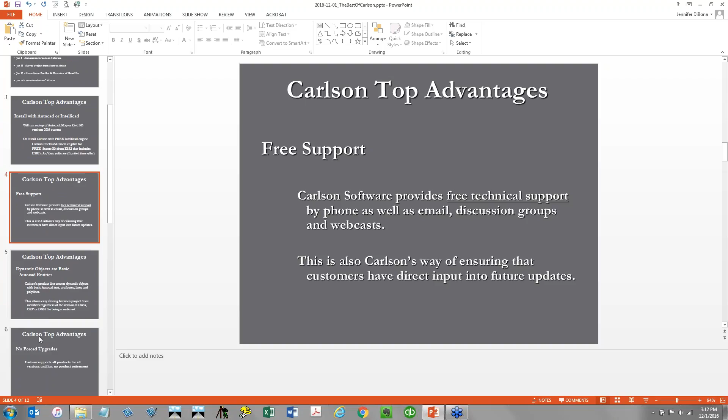All right. Carlson's got a lot of dynamic features, a lot of dynamic reactors when you update a surface or update a centerline or something like that. However, everything that Carlson creates are basic AutoCAD entities. So you can do things like automatic leaders with your points. You can move contour labels along the contour, have it slide along it. But it's doing it just with contours as polylines, and text labels.

It's not unique proprietary objects like Land Desktop and Civil 3D use, where you get proxy errors or you have trouble sending or receiving those files from somebody not using your same version of Civil 3D. So it's very friendly regardless of what other programs you use. Those Carlson files will convert real easily to DGNs or DXF or whatever you need to send it to.

Carlson does have an annual maintenance program for the desktop software, and that would include the latest release of Carlson plus whatever IntelliCAD is shipping with it at the time. It's optional, so you don't have to do it. I'll go through some pricing here in a minute, but it's 10% of the retail price each year. And if you skip a year, 2 years, 3 years, the price goes up incrementally. But no matter how many years behind you fall, you're never going to pay more than 50% of the retail price to get up to date and current. So it's a good thing. Staying on maintenance is, I believe, still the cheapest way to stay current if you wish to.

Okay, so I am running here Carlson 2017 with IntelliCAD, and we've got our menu bar here. And one thing you'll notice is that in all of the Carlson desktop programs, depending on what version, the first 7 or 8 menus are going to be identical. So in every single program, you've got everything under the File, the Edit, View, Draw, Inquiry, Settings, most importantly, Points. Everything under Points you're going to have in every program. So if you're in GIS, you may not think that you get all the points functionality, but you do. If you're in CADNet, you may not think it's necessary, but you get it.

3D solids, if you're running on IntelliCAD, this is new in 2017, you get that one too in every program. Here in Carlson Survey, there's just a few menus that are completely unique. So the Survey menu and the COGO menu can only be found in Survey. And some of these commands are going to be in construction, so there's some overlap. Centerline, area layout, annotate, and surface are in civil as well. However, if you're in civil, and I'll show you this in a second, you've got a surface menu, then you've got a centerlines menu, then you have a profiles menu. And here in Carlson Survey, you don't have the profiles menu, but if you look down here at the bottom, you get a lot of profiling ability. So I will go through some of that today.

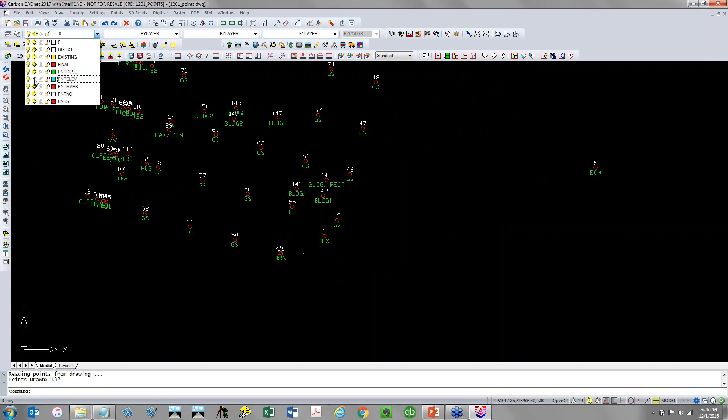Also my layers, everything's on the same layer here. So if I freeze points, everything goes away. If I freeze the point elevation layer, all of the elevations go away. Same with description. So functionality, it's not the greatest if you have to try to connect all these. Now I'll switch back to survey so that I can go in and draw with field to finish. And okay, I have to select my code table. And I'll use this one.

All right, so I'm going to just jump into my edit code so you can see here real quickly things like my back of curbs. So I can set up 2D and 3D polylines. I can set up special symbols if I want, special line types if I want. Got point groups, different layers for 2D polyline versus 3D, different layer for the points, all kinds of stuff.

Also, this is going to come up for things like property corners or fire hydrants that will have a good elevation shot in the field but may not be optimal for surfaces. You can also tag certain points by their description as non-surface. So you'll see that when I go to build a surface from this, anything that I've tagged as non-surface is going to be ignored. So I'm not going to make any changes.

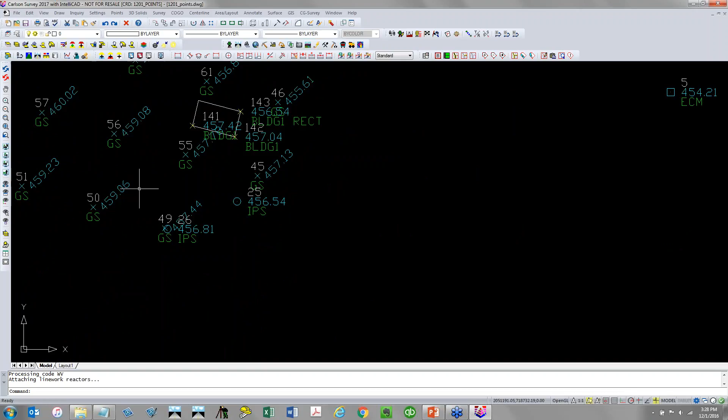And I'm just going to redraw everything. This time with field to finish, you can see the difference. So I've done a lot of different things here. I have different symbols. My sizing on my symbols may not be perfect. So it is a pine tree symbol. Property corners have open circles. Ground shots have this elevation kicked out at a 45-degree angle, so it's really easy to see. You can see I've got line work that's been drawn.

So we saw in the field to finish codes that we've got 2D and 3D line work, which I can show you in a second. But my layers is the big difference here. You can see I've got a ton more layers. All of my points are on layers with V-NODE, so it's kind of a modified National CAD standard. I'll turn on a couple of these.

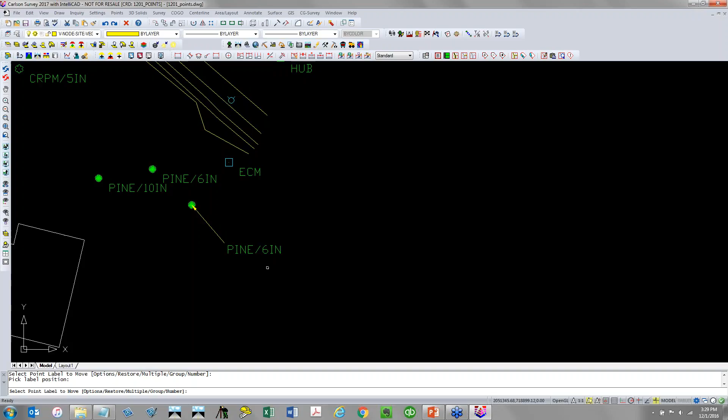So I've even got my layers broken out a bit so that if I choose to, let me turn off just the elevations. If I choose to turn off certain things, I can have my corners labeled, and I can even use the descriptions from the points as the point labels if I want. So I can do some other things with my coding and make that a little more descriptive. It's not perfect. There's a crepe myrtle tree, things like that.

So we can use different coding to size symbols, to bring in canopies. If you have several trees and have a real size canopy, it will merge those together to actually get the combined canopy. So all kinds of things with this. So let me go ahead and turn all my layers back on.

And let's look at this in 3D. Usually I do this right before I build the surface, and I'm not quite ready to do that yet. But if I look in my 3D viewer, I'll just select everything here, and I can tip it up on its side, you can see that I've got everything colored by elevation. My highest elevations are in red, my lowest are in blue. It's a pretty flat site,

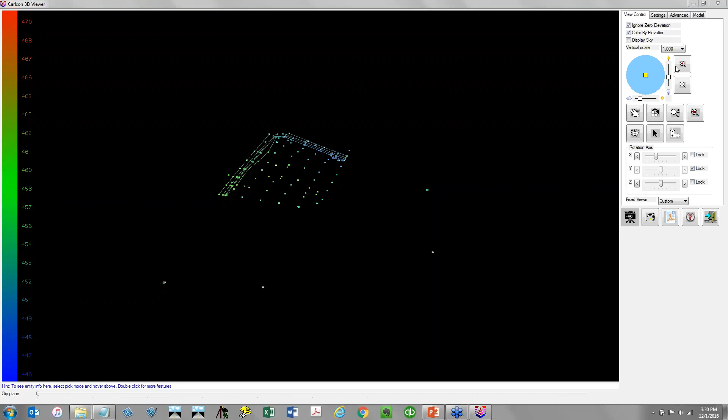so if I want to, I can exaggerate my Z values. So you can actually see the 3D polylines that were drawn, my elevated points. And if I zoom out here right now, all my zeros are being ignored. So I'm going to uncheck that, and now you can see the 0 2D polyline versions of everything. So I'll turn that back on.

But before I build a surface, this is one of my checks. I would want to look at it here in 3D, spin it around, make sure I don't have any bad elevations. Now I've clearly got good topo, good break lines here, and some boundary points out here that I'm going to need to ignore for my surface, and I'll show you how that happens.

But before I get to the surface, I also want to show you, this is kind of neat. I want to see if we've got any monuments close. Published control is what Carlson calls it. And this is one of the commands in the software that is coordinated by Esri. In order to do this, though, I need to make sure that I'm georeferenced.

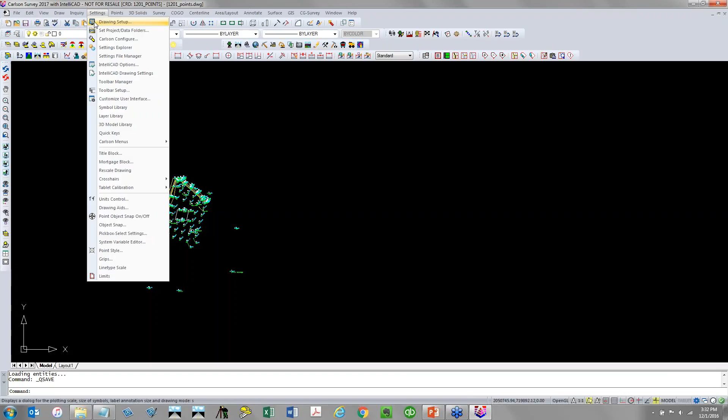So if you look at my coordinates down here, I am in North Carolina, my coordinates are real, but I still have to go to drawing setup, and I can set this up with my template or on my startup so that every drawing that I start is always in a particular zone and projection set at a current datum. Didn't have that here, so I had to make sure to turn that on.

But now this is under the points menu, so you get this in every program. Point utilities, search published control. So this is looking at, I think, is it NGS? So what you do is just zoom into the area on the map. Okay, so this little project, gotten lost, right down here.

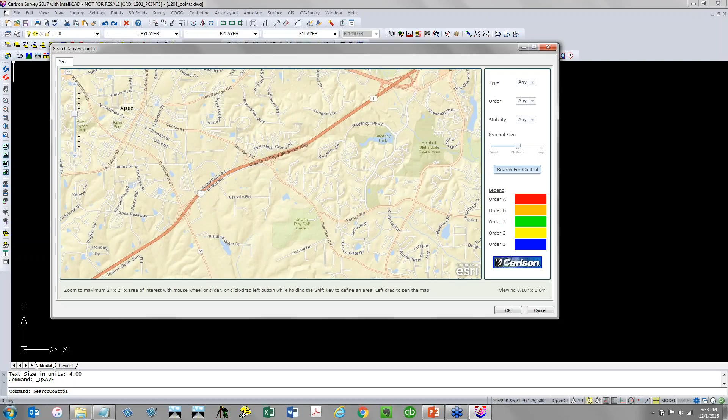All right, it's not giving me, I'm not seeing my apex. There we are. Oh, I was in the wrong place, so we're down here. So we're right in this area. So once I zoom in somewhat close, I'm going to search for control. And it's going to pop up these little icons.

So there's a legend. You can kind of see what the quality is. I'm not going to worry so much about the quality just in this demonstration. So if I click on these, it gives me a link. And if I click on that, it's going to open it up in a tab and show me the data sheet.

And I can switch back to the map. I can pick as many as I want. Click on any of the links. It opens as many as I need. You can close whatever's not good. But when you have the ones open that you feel like are going to work for you, you can hit the OK button. And it gives you the option to just take those points and store them in your coordinate

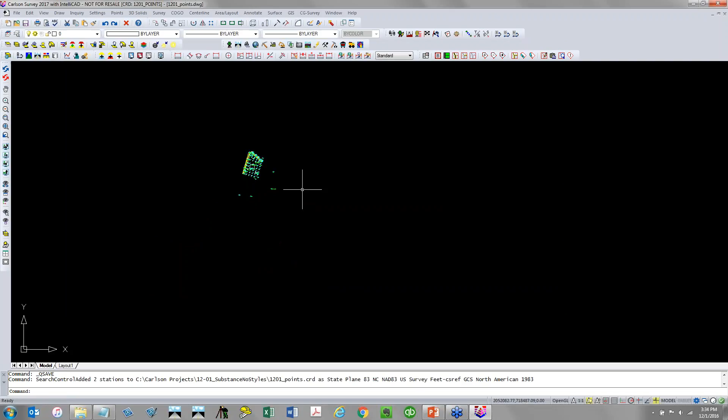file. So it takes just a second, and you kind of have to learn this. It does exactly what it said it was going to do. It put them in your CRD file, but it doesn't import them into your drawing. You have to go look for those. So I'll open this up under Edit Points. And if I look at the very bottom, you can see that these 2 points have been added.

They have an alphanumeric number, so I always just kind of take that out. So I've got points 1064 and 1065. And if I go back to my draw locate, I just want to draw a range and see those two. All right, so they just came in, and here's my Violet, and here's Pete. So I got those two in.

So while I'm talking about the georeferencing and other commands that Esri has worked with Carlson on, let me switch to GIS here. Okay, so now I had trouble. This does go online. You do have to have an internet connection for Search Published Control, and what I'm getting ready to show you. This did not work earlier today. I was getting an error connecting to the database. So there's another way around it, but sometimes this happens.

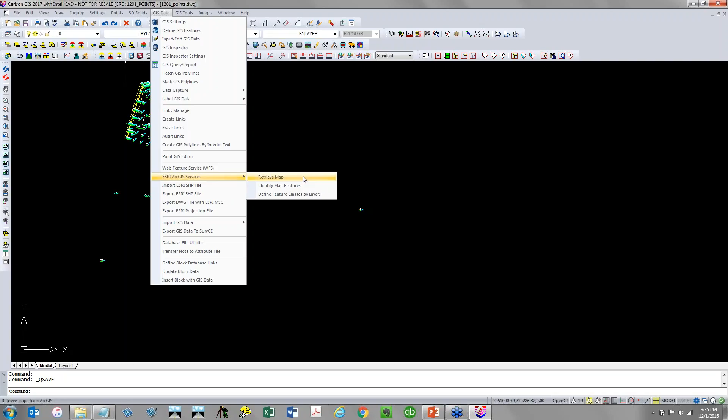So I'm going to do Esri ArcGIS Services Retrieve map. This is only in Carlson GIS. So these are the different maps that you can bring in. What I'm going to do is a world imagery, but just kind of take a look at what else is available. NGS Topo is going to be like a quad map. You're not going to have your different quadrangle names and things like that. You just pick an area on your screen. Under specialty, you can get things like a state soil survey. Okay, so you can kind of dig into this and get a lot of cool things.

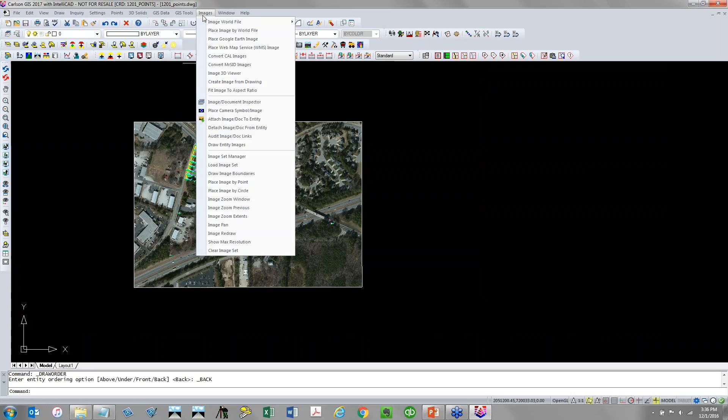So I mentioned a workaround. Also, Carlson just gave us this, I think in 2016. You can do place web map service image, and it kind of sort of does the same thing. It gives you a few other options. It will pull in the same maps that the Esri does, and then there's some different ones. What's nice about this, it also gives you the ability to connect to maybe your local government agencies that have their own map service. You can possibly pull in from there.

Under GIS data, there's a web feature service. So like NCDOT, you can pull in some highway feature lines. So this is more polylines and line work and nodes and things like that, as opposed to just images. So, all right, any questions?

All right. Hey, Tim, I've unmuted you. What's your question? Can you hear me? If you don't have a microphone, you may not be able to talk back to me. So you can type in your question and I will look for it. All right, I'll keep an eye out for that. And I'll keep your microphone open here. If you figure out how to get that to work, holler at me.

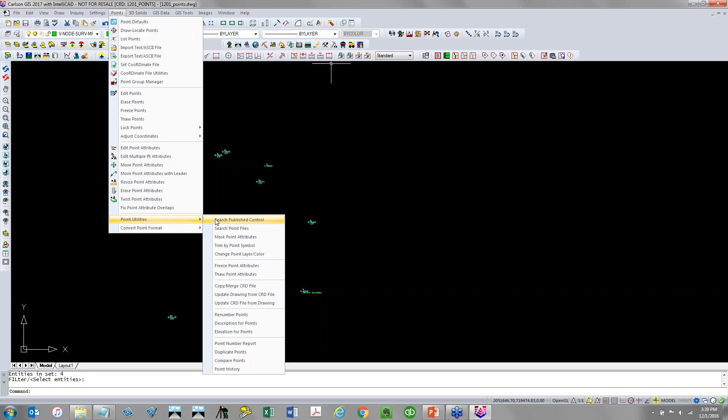One of the cool things about this command, all right, I got Tim's question here, where do I find the survey control points? Are you talking about the command that I just did? If so, it's Search Published Control. Not sure if that's what you're asking about, but okay, that was it. Cool.

All right, so I'm going to enter this deed description. You can see I've got my monuments here. I'm going to start at point number 4, and then I've got on a piece of paper here beside me, I've got my calls. So I am going to key this in. I'm going to go back to Carlson Survey.

So there are different ways that you can enter line work based on bearings and distances and different angles. But doing it the way I'm getting ready to show you, it saves it as a deed file, so it's very editable, and I like it. This is one of my favorite commands in Carlson. So I've got an option to create points. I'm not going to. I'm going to store this to a deed file and start with point 4.

All right, and I am going to start off with a bearing northeast 65 degrees 44 minutes 47 seconds at 35.67. So looking at the command line, 1 is my quadrant. 65 degrees 44 minutes 47 seconds at 35.67 feet. Next is going to be southeast 49 degrees, 30 minutes and 7 seconds, 197.58. Next is going to be southeast 52 degrees, 45 minutes, 14 seconds, 285.33. So far so good.

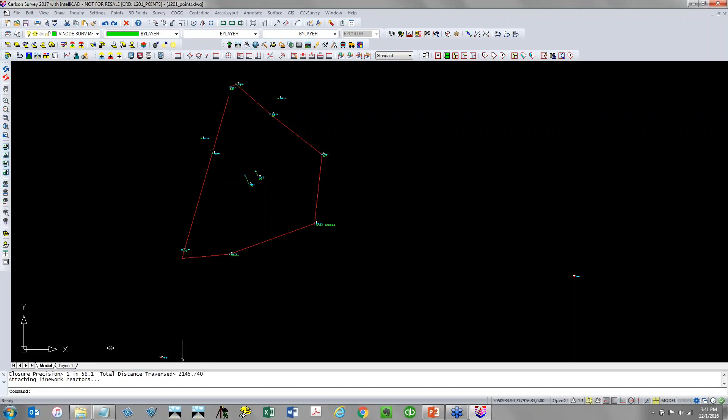But we've saved it as that deed file, and so if I go back to survey and process the deed file, I can see it in this neat little editor. So in the top I've got a table, and this is stretchable now. If I click on any leg, it actually highlights it. So the issue here is this leg, and the bearing actually should have been a northwest bearing. So I just had the quadrant wrong. It closes it up nicely.

I can change my point of beginning here if I need to, but I'll just leave it as it is. Again, this is a demonstration, so I'm not professing the right way to do things. But if I report that deed now, you can see I get a much better closure, a little bit perfect. I can also redraw it with the labels this time. Okay, and then we'll just exit and save it.

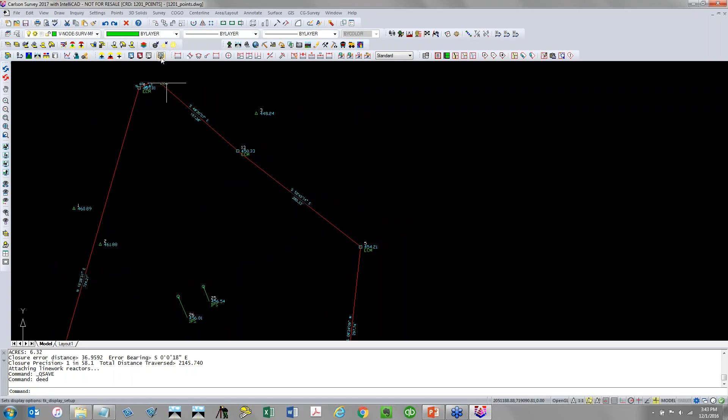And this time when it's labeled, you can see it's used what we call the auto annotate function. So everything is labeled exactly the same with bearing on top of the line, distance below. I'm noticing an issue here. So got a dead black area up in here. So let's just save. I may be partially in the middle of a crash.

So let's look at annotate, and the auto annotate, I can go in here and you can see that's how I had this set up. So if I were to choose instead to have both my angle and distance label above, right now they're both on the first row, and so they're side by side. If I change the distance to the second row, you can see how it shows it. And then all I have to do is just pick on this, and it's going to label everything.

So what's kind of neat is you do this auto annotate, it does everything the same, and then you can go in and just kind of tweak it. So maybe this particular leg you want to label a different way. Well, under angle distance, you've got all these different options and combinations. So maybe we want bearing and distance above the line. When I do this and I click the polyline, it only does that one leg. Same thing here. It's a short little segment, so maybe I want to do annotate with the leader and just pull that out. So I can do things like that.

Any questions on this? Okay, so I'm going to turn back on my building. See if I can figure out what layer that's all on. The building, there we go.

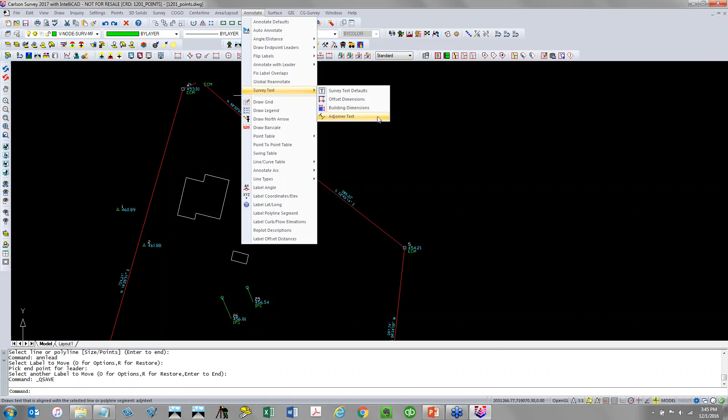All right, so let's show you another annotation command on here. Now this is a little bit specialized. It's called survey text, and there are 3 different formats. There's offset dimensions and building dimensions and adjoiner text. Building dimensions lets me do things like this. So I pick this and this, and I've got my default set up so that it just kind of quickly labels these.

The other one that's pretty handy is offset dimensions, and this just kind of saves picks and clicks. So when I do offset dimensions, it just put me into an endpoint object snap without me doing it, and then it puts me into a perpendicular object snap. Hit enter to repeat, automatic endpoint, then automatic perpendicular. So just little time-saving tips like that can really help you out.

Legal description writer. So everybody asks about this. Under survey, we've got legal description writer. There are tons of options down here in the settings. You can get the verbiage just like you like. I'm going to pick a boundary polyline. Just pick this. Click OK, and I get this little report.

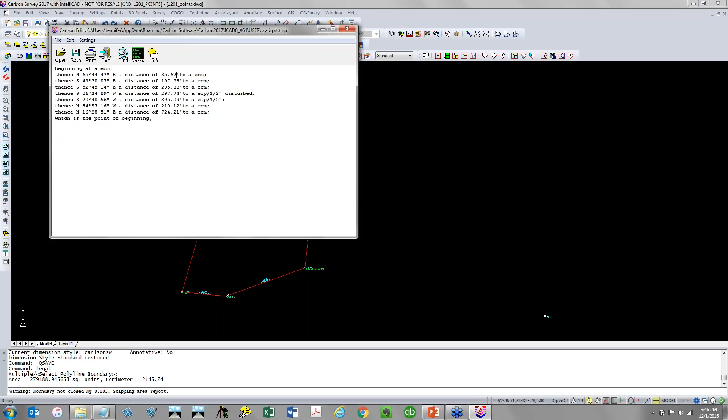So it's not the prettiest, but it's a start. This is a little notepad, so you can actually just copy this out. You can actually have this launch Microsoft Word if you want, and take it straight to a Word document. So a lot of things you can do. You can see that it is reading my property corners as it gets close enough to it.

All right, so I think I'm ready to get into doing a little bit of surfaces. Any questions on labeling or annotation? May have a little bit more of that coming up. All right, so let me turn on everything. I think I want to erase that image because I'm not going to need it the rest of the time. Yeah, that's kind of goofy here.

All right, I also am not going to want that boundary, so it's on that layer. Thought it was on that layer. What layer is it on? It is on that layer. I don't know why it won't freeze. There it went. Okay, I don't know, maybe I just didn't hit it.

All right, so before I build a surface with these points, I mentioned earlier one thing that you would want to do is to look at everything in 3D, which we did. The other thing you want to do is make sure you have a good surface boundary so that you don't get any stray triangles. We want to make sure it discards any elevations that shouldn't be part of the surface, like I mentioned earlier, property corners, fire hydrants.

But if, and this is a pretty regular shape, but if you have an odd-shaped area, you may create triangles that just don't really truly represent the surface that was topoed. So Carlson's got a command, and I'm going to just show you this as a kind of a demonstration. It's called shrink wrap entities. I think the original purpose of it was for surface building and to get that closed polyline around the entities that have good elevations for your surface.

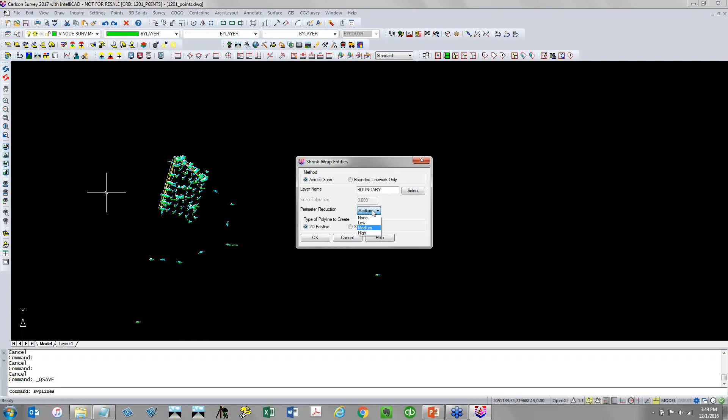So this is going to create a closed polyline around whatever I select, and I kind of want you to notice what it does. On that layer, there's 4 levels of tightness if you want to think about how it's wrapped. I'm going to pick medium, and it's going to create a 2D polyline for me. Now notice when I do this, I put a window around all this, and notice where that shrink wrap polyline showed up. So it's very intuitive. Notice that it grabbed the ground shot, but it knows to ignore that property corner.

The reason that it's doing that is if you remember when I went back to field to finish, I drew these with field to finish, and my field code for IPS points, my field code for ECM, and some of these others were set up as non-surface points. When it's a non-surface, it's going to be ignored. Even if I try to pick it to build a surface, it's going to ignore it. Shrink wrap ignores it as well, so that's why it completely ignored it.

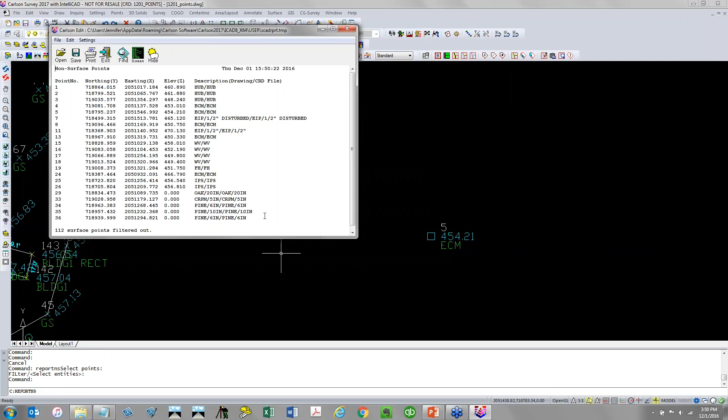If I look under triangulation, set up utilities, non-surface points, and do a report, I didn't mean to do that. Let's do it all here. There we go. You can see all the points that are being ignored. Okay. So that's the reason I got the shrink wrap that I did.

Now again, this is just for demonstration. I want to see what works. So if you've got a weird shape, maybe the low setting on that would work. This is the medium. Maybe the high setting is what you need. But the reason I do this before I build the surface is simply to find out, one, that the boundary that it creates is going to work for me, and two, which of those settings is going to be best. So I'm going to use the medium.

Now when I delete this, the reason I can delete it is when I go to build that surface here under Triangulate and Contour, you'll see that shrink wrap is actually built into this command.

My only problem with it is that it doesn't show me what it used. I don't see what that medium shrink wrap looked like from here. Once I build the surface, I can have it draw it, but it's already done. I don't get a preview, so I like to do it ahead of time.

I'm going to have it write a surface for me, so we'll call this, I'll put today's date, and I'll just call it, this is a surface of points. It ignores 0 elevations here. I'm going to have it draw 1-foot contours with labels that are going to hide under labels, so that just means it's going to use a text mask. And it's going to use 2D and 3D polylines and points.

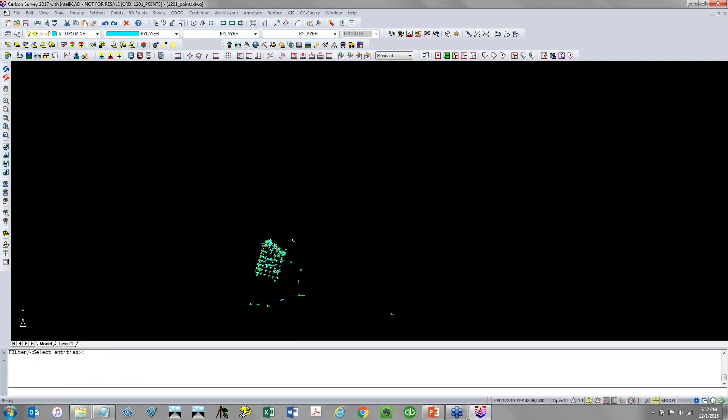Now I've already seen what's going to happen using my shrink wrap, so I'm safe in putting a window around everything, and you can see where I got those contours. So I'm going to freeze all my points, and I shall also freeze my building and some of these labels.

Okay. So you can see my contours, you can see the labels that are with them, and I mentioned this earlier. So this is one of the things Carlson lets me do, is contour utilities. I can move a label along a contour, and I can do this even though the entities that are being used here, if I list that, it's just a piece of text. If I list that contour, it's a polyline. So Carlson is giving you all this dynamic viewing ability and dynamic reactions, even though it's just using basic CAD entities.

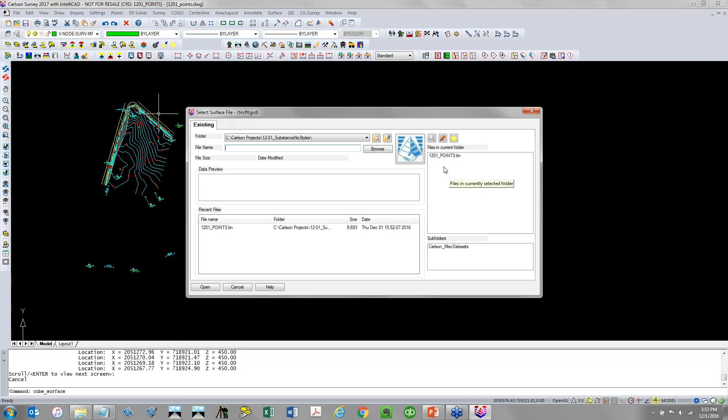Now we've built that surface, we've saved it as a .tin file. So we've got another option for viewing now. Earlier we did viewing the drawing, now we're going to view the surface file. And I'm going to select this. I just noticed a question here, so I'll jump over there in a second. So here's my viewer. So it's the same thing. I can exaggerate if I like. See if I've got any problem points jumping out at me, and I don't see anything. I've got a nicely defined ditch here.

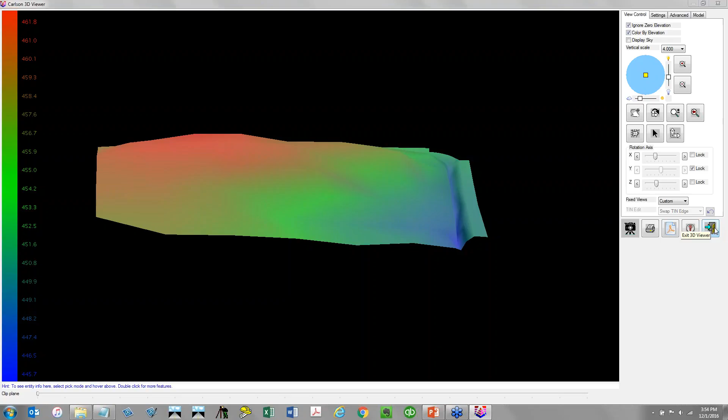Okay, and let me check out this question. Show how to list non-surface points. Okay, did you put that in before I did that, or do you need to see it again? I will show you again just in case. I may have already answered that one. But to see those, now it's in a little different place if you're in survey versus civil, but we're under triangulation setup utilities, non-surface points and entities, and then report non-surface points.

And that's what I got. I don't know what's going on here. But all right, so if that was not the answer to your question there, let me know. Hit me with it again in the questions.

So I want to do a couple things manually. And we're probably going to go for about another hour here. And I will give a little bit of an apology. Most of my time is spent training, not demoing, so I tend to get a little too deep into some of these commands. And I know that a lot of you don't have Carlson, so you're not necessarily wanting all the deep stuff, but that's kind of how I do it, so I'll probably end up taking too long.

But I want to show you manually how to create center lines, how to station them, how to manually create some profiles. When you get to road design in Civil, and I am going to show this today, there is a cool feature called RoadNet that does all this stuff very automatically for you. But if you're in Carlson Survey, you don't have the RoadNet command, and so you have to make all these profiles kind of manually. I think it's pretty cool.

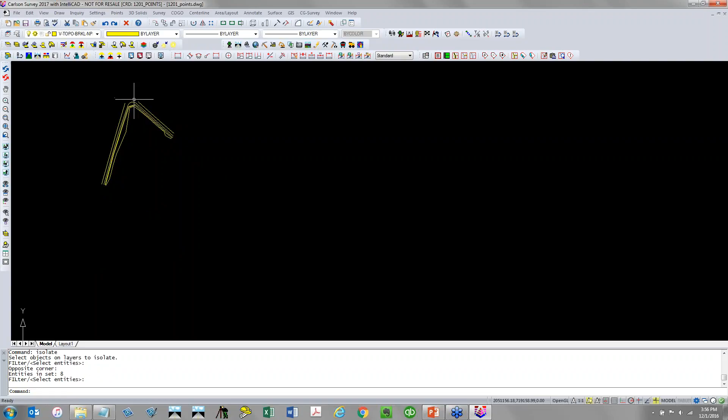So I'm going to go to 2D polyline, and I'm just going to draw a polyline. That's fine. And just kind of sketch it in. I'm going to do this as a little bit of a center line. Okay, it's not all yellow. And let me give it a fillet with a radius of 150 feet. And just pop that in here. So this is polyline, drafted it out.

And I'm going to go to centerline and use polyline to centerline file and give it a name. And we'll just call it CL1. Select this guy here. So at the command line, I've got an option. It shows me these little marks telling me which direction it's going. It gives me an option to reverse it. So I can type R once to reverse it, R again to reverse it back. I can change the beginning station if I want to. I'll just leave it as is. So it's created it here.

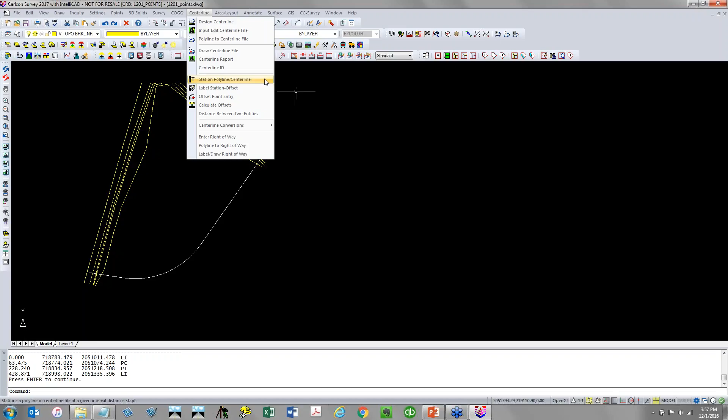I've got a command to station a polyline or centerline. So the name of it's important. I didn't have to create a centerline file in order to station it, but since I have created that centerline file, I'm going to use it. So when it says centerline by, I'm going to make sure to click a CL file. Here's my option for a 2D polyline.

So a lot of things you can do in here, locating offset points, and I've got some other options for you to do that. But here's my centerline. You can see my stationing. And here we go. All right, very easy, nothing to it.

But I want to pull a profile for my surface. I've got a surface under that. So under the surface menu, I'm going to create a profile from a TIN surface. And the TIN file, I don't know why it keeps doing that. Okay. Click OK. And this new profile file to write, I'm going to name it the same. I think I called it CL1, and this is going to be my existing ground.

At the command line, it's asking my centerline polyline, but I'm going to use it with a CL file and use that one that I've defined. So we've got that here. All right, so it's found it again. It created it. It doesn't give you an option to draw it from here.

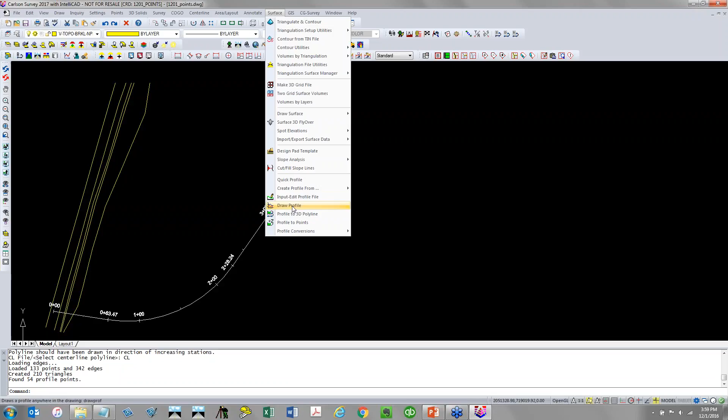So if we want to draw it, I'll go here, add, and got all my options. I've got it set up to be a 30 and a 3. And we'll just pop this in here for a minute.

So I want to look at this profile file. I'm going to do input edit profile file, select this, and this is, again, one of the cooler commands. This is the manual way to do this. You can input edit profiles from several different Carlson programs. But the key to this is the type of profile. That's what makes it pretty powerful.

This is a generic profile. It's just existing ground, so I've got a bunch of stations along that center line, and the elevations where it crosses a TIN line, nothing big. Okay, but let me show you how you can use this really to a big advantage. I'm going to go back to input edit profile file. I'm going to create a new one and I will call it PG road.

Right now it's blank because my proposed ground, my road design, doesn't have any stations. Notice that when I create a new one, I don't know why, but it automatically knows I want to create a road type profile. When you change the type of profile, it changes the headings. So notice the generic type, station elevation slope. Road, you still have station elevation slope, but now you have vertical curves and K values.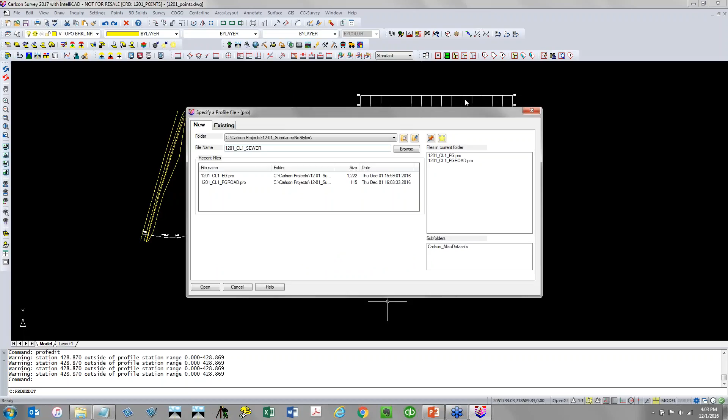Let's kind of take this an extra step, hit enter, go right back to it. This time I want to enter a sewer. So again, maybe I am trying to go from paper plans and I've got some kind of a sewer run. Now what I'd like to see in the background here is going to be that proposed profile, proposed road. So I may not start at station 0 here. I'm going to change this to a sewer type.

Maybe it's station 150. And this is a little bit tricky of how it is. Your rim elevation is going to be the elevation of my reference profile at 150. So 453.32. And then I don't know if I can do a depth here or not. Yep. So if I put in the rim elevation and put a depth in, it set that. And I'm just going to do one more, let's say at station 250.

Okay, so notice right now it's showing, this is where I get into it a little bit too deep, but the reference elevation right now is 449.31. But if I change it to road, I'm on a curve at that point. So it's actually 449.68 would be the reference elevation. So that's the one I want. 449.68. And maybe I'd go with a depth here, 4. All right, so it looks like here that it's just above the road, but if we view this as a road profile, it's not.

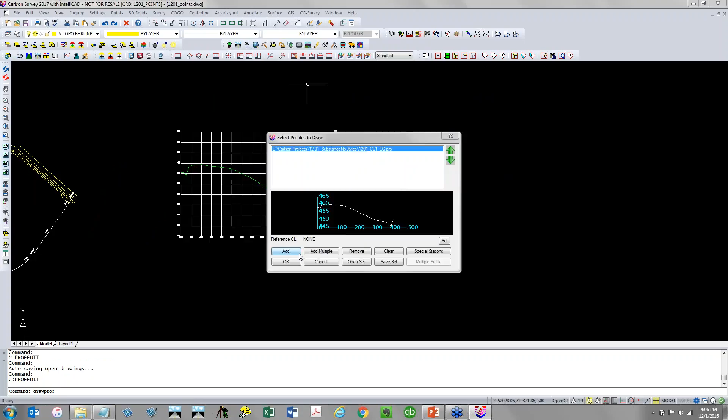So if I go back now and I draw a profile and I want to add, yeah, I should have done multiple, then sewer, then crossing, click OK. So all those different types have different labeling. There's different annotation that you can apply depending on the different types. So sewer, we can do all that here. Okay, if you've got crossings, you can see the different labels.

So you've got adjustments you can make across the board. I'm going to redraw all this and just pop that in. And it ain't the prettiest, but you can see how much we can do. So I'm impressed with how much you can do profile-wise just from Carlson Survey. So any questions? All right, very good. Let's move on now.

And we're going to get into, looking at my time here, how much time I've got, so let's look at LotNet. So I'm going to not spend a whole lot of time in this. All right, so I was in the middle of a lockup. Let's save that. So this is kind of a known issue that I have been working with Carlson Tech Support.

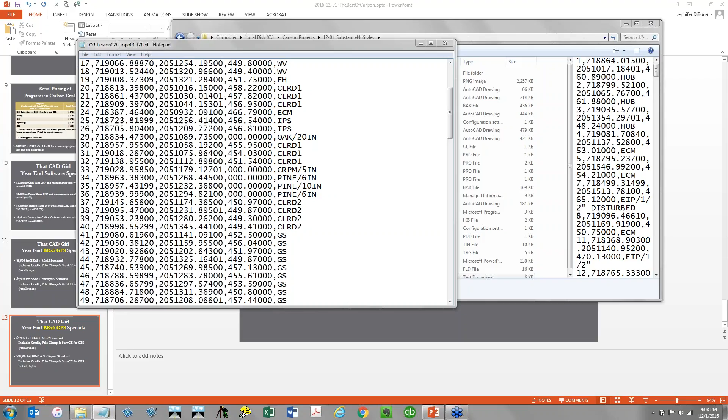We haven't quite narrowed that down yet. But my LotNet, I'm going to open this up. All right, so I've got a closed boundary. Now you can start without any roads drawn. You can have it draw all the roads. You can have it put it all in. In this case, starting a little further down the road, no pun intended, have a closed boundary. I've already got my center lines. I've already got my rights of way drawn in.

So with Lot Network, I'm going to use my LotNet toolbar. And let's just look at the settings. So I will create this Lot Network file. And I'm going to have it label my areas. I'm going to have it draw setbacks. I can set all that up. Now I'm going to set my boundary polyline. And because I've already got my right-of-way drawn in, I need to add those polylines in so that it knows within which areas it needs to create my lots. So I'm going to select 1, 2, 3 right-of-way polylines.

And now I'm going to go straight to this. So subdivide area. With this, you're going to start off by having it lay out lots in a large area and then see how good it does. Then you can go into smaller areas and tweak them. Take out a lot line here, put a different one in. So we're just going to have it do all the lots in here and just see what it comes up with. So command line tells me to pick inside the area to subdivide.

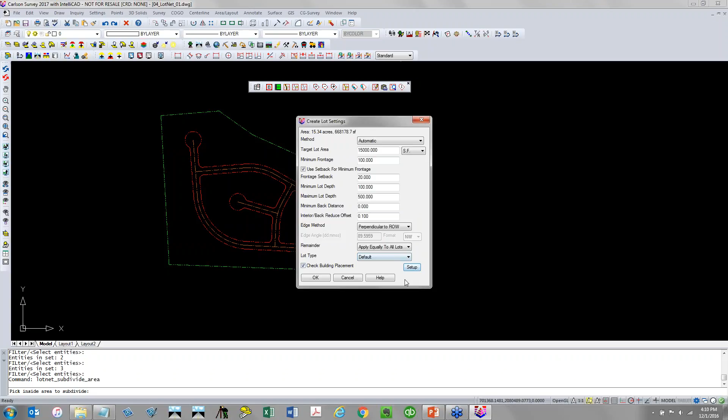I'm going to use a lot area of 15,000 square feet with 100-foot frontage. I've got setbacks, it's going to create setbacks. So I'm going to have it use the setback for the minimum frontage. So as it goes around this cul-de-sac, it's going to use the setback to make sure I've got the frontage that I need. So there's my frontage setback of 20 feet. I've got some other things. As it lays these out, if I have anything extra left over, it's going to apply those to all lots, and I'm going to have it check my building placement. So I'm going to have it draw, yeah, that was in the previous screen, I think a 30 by 30 building pad, and we're just going to see what we get here.

So it recognizes the frontage polyline. I'm going to tell it to start drawing lots from here to go around. If I wanted, I could start it here. And it's doing its calculation. And, all right, so looks like we've got building pads in all but one place. Right here, that's kind of silly. So it's labeled everything. Now, sometimes the labeling goes a little bit haywire. So if you go to Lot Network Labels, you can have it just redraw everything. And a lot of times, yep, it fixes it. So it didn't do a bad job. I'm fairly happy with all that. Maybe I could tweak a little bit in here.

So now we have these commands where you can remove a lot edge, you can add a lot edge. So if I remove, maybe I'm just going to take away all these. You can see how it combines everything. I've got one big lot now. And maybe I want to just draw a normal everyday polyline from here and go in perpendicular to here. And let's also go from the center of this cul-de-sac, maybe something like that. See if that works. Trim this guy up. And then I'm going to add these two as new lot polylines. So there's nothing more to it than that. Add those two. And so it just kind of redoes everything for me. And it's really that simple.

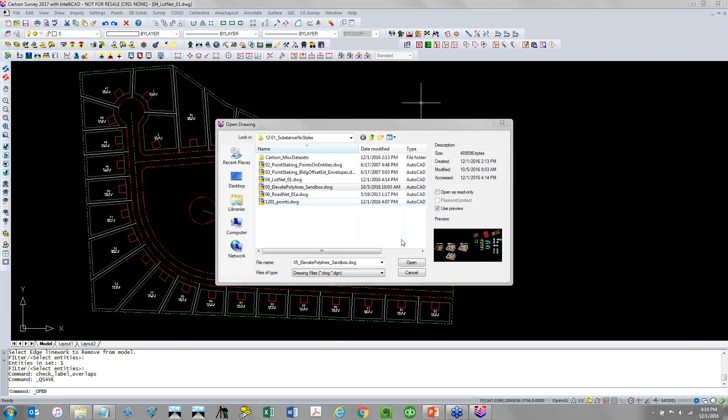All right. And let's open up.

All right, so I want to show you, before I get into Civil, this is the most powerful menu, in my opinion, in Civil. It's this 3D Data. This is also in Takeoff; it's called the Elevate menu. But if you look here where the real power is, and this is really just for grading. So I'm going to run through a whole bunch of little tools. I call this a sandbox or a toolbox, however you want to classify it.

But I'm going to use these 2D to 3D polyline tools. So you can see the different options that you have. If you have 2D zero elevation polylines, and then you have points that define what proposed elevations are, breakpoints. If you have text that defines those breaks and elevations, if you have text with a leader. So you can use all those things to get 2D to 3D polylines.

So I've got an example here. If I go to Drawing Inspector, you can see this is all 0 elevation. The points are elevated, but everything here, these all have 0 elevation. So I'm going to use different commands to elevate everything. Under 3D Data, 2D to 3D by points, at the command line, I'll give it a tolerance, and then it says select polyline to convert.

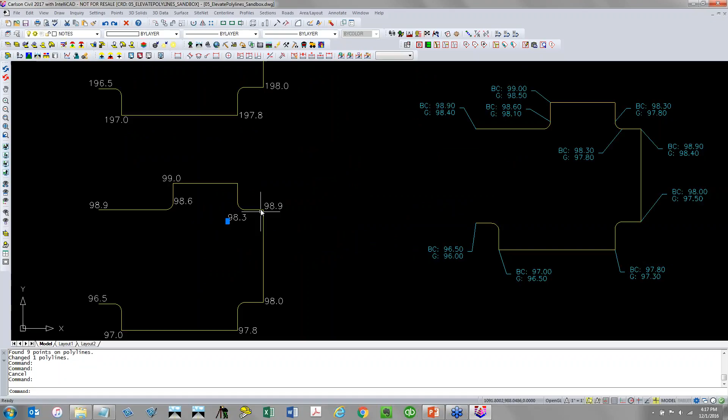So this is another method. Not crazy about this one. This is just by text, and it's a little arbitrary. So things like this, there's not necessarily a good vertex for it to use to elevate. So I'm never quite sure what it's elevating to 98.3 in this case. But we'll go through it. We're going to do all 3 of these at once.

Just kind of picture having a Walmart or a Target parking lot that you're trying to grade out. Everything's drawn in 2D with spot elevations, and you can do all of it in one fell swoop. So 2D to 3D polyline by text. Select a sample of the text, sample of the polyline to convert, and then I just have to put a window around all that. It's looking for the layers, it's looking for the type of entities, so text versus MText.

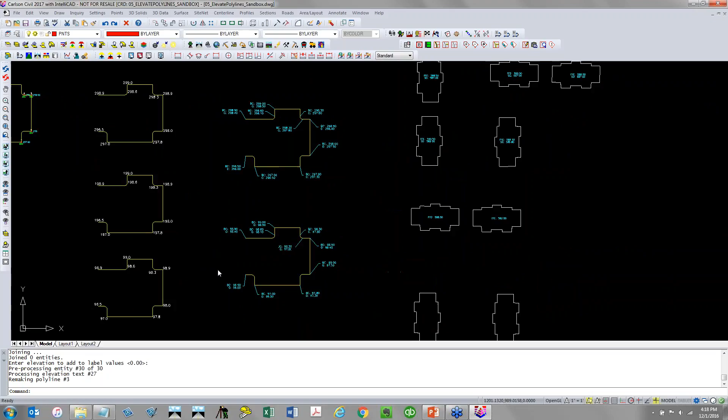And if you check this out, everything's elevated. Again, it's a little questionable on how it does if it doesn't have a vertex nearby. So doing it by points and doing it by text with a leader are going to be my 2 favorite ways. These do not require that you have a vertex.

So for instance, if I just copy this up to here and then maybe I just do something like that, and maybe I change the elevation here to something really high, it will create a vertex here at that elevation. So just from those text and leader entities. So by text with leader,

sample of the elevation text is here, sample of the leader is here, sample of the polyline to convert is here. I can put a window around my entire project area, and it's only going to grab the important things. So it says, okay, I found 2 elevation labels. Which one am I to use? Use the back of curb, and that's what it's done. So you can see it's inserted that vertex, and if I hover over it, it's elevated just like I wanted.

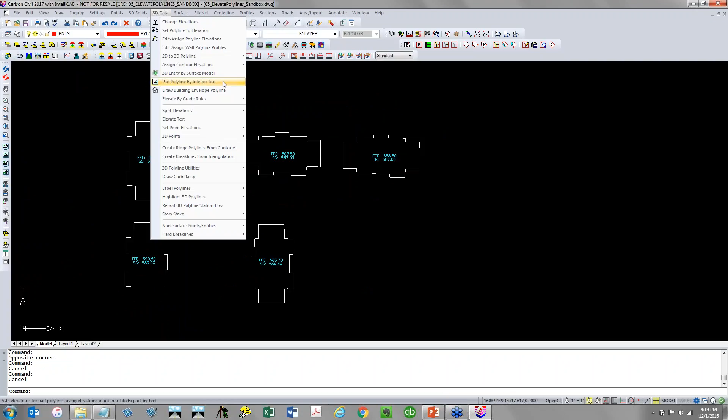All right, so a few more up here. We have building pads. Same thing, 0 elevations for all of these, but we have labels. So we can do pad polyline by interior text. It's going to create a new layer for me on these. Select a sample of the text, sample of the building, window everything.

Which one do you want to use to elevate? We've got that. And so now this one created a new layer for me very easily. You can see that it's elevated based on the labels.

All right, so I think just one more. So we've got a pad that's not elevated here. Should have used it. I'll use that same command and just elevate this. Okay. And then again, for grading, this is one of the cooler things.

So points by slope: I'm going to create new points based on a starting XYZ, and then for the new points I'll be able to define how the elevations are set based on a slope from the original. So I'm going to do it by screen picking a new one, giving it a slope in percent. So I'm going to start just at a nearest point here, and oh, hang on, didn't grab my elevation.

So let me freeze, see if that works. All right. It was reading the elevation of the pad underneath. Nope, it's still reading a 0 elevation. All right, that building's on the wrong layer. Should have just changed the elevation or changed the layer name.

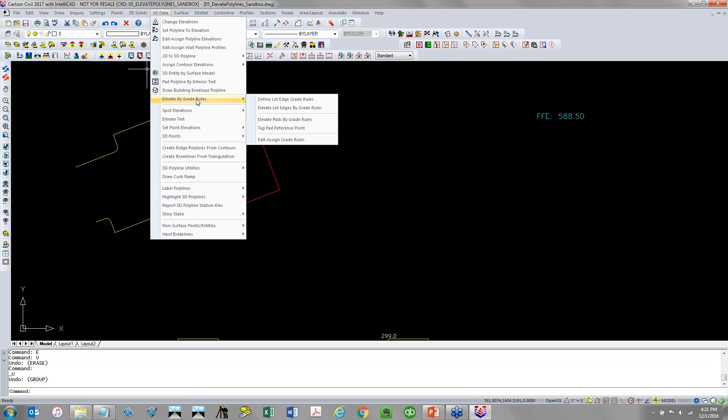3D points by slope. Try one more time. Snap to nearest here. There we go. Target point. I'm going to go to this endpoint at a -2%. Description, we're just going to say BC for back of curb. Next one is from here. Add a -3, let's say.

Oh, did that wrong. All right, got ahead of myself. Let me erase that one. All right, I need to fix that. Needs to be on a different layer. There we go. Now I can turn that back on. Everything should work. Should have done it right the first time.

Snap to nearest from here, and then going to go to here at a -3. All right, so you can see my elevations are different, so it has calculated that. But there's a lot of neat little ways that you can calculate points using that command. If I hit my Enter key and go back in, notice that I've got screen pick, and that's going to be a straight line slope calculation.

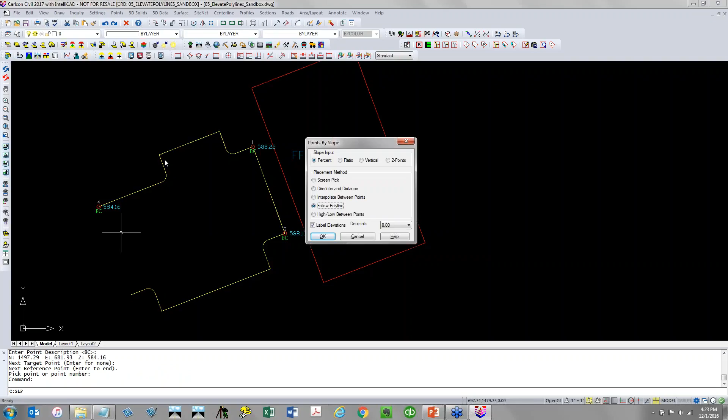So I'm going to start from point number 3, and I'm just going to set a point over here, and it's going to calculate that straight line slope at a -3%, and you can see the elevation I came up with. Then I'm going to go back into the command, tell it to set the point at the same location, except it's going to follow the polyline. So it's going to follow the polyline along this length now, and we're going to have quite a bit of a different elevation on it.

So target point is going to be here again, slope -3. Pick the polyline to follow here. We'll do BC, and I'll just actually do BC by follow. And then if I pull that out with a leader, you're going to be able to see what it's done. So 3-foot difference. Any questions? Okay, so very powerful. There's some other tools in there. I am going to move on so we can get into RoadNet and a little bit of hydrology.

So RoadNet is in Carlson Civil. It's in construction, and it's almost like a wizard, but it's such a powerful feature. It's going to combine creating the centerline files, profile files, earthworks. It can export out to SurvCE data collection, everything that you need. Your viewer, you can drive it in 3D, everything. The only thing that you need to start with, you have to have an existing ground surface.

And then what I've got here are 0 elevation 2D polylines for my center lines. So you're going to want these to be geometrically precise. For instance, actually I don't think this should be perpendicular, this should be perpendicular. I do need to make sure they intersect, because if they don't truly intersect, if there's just a little bit of a gap, it will not recognize this as an intersection.

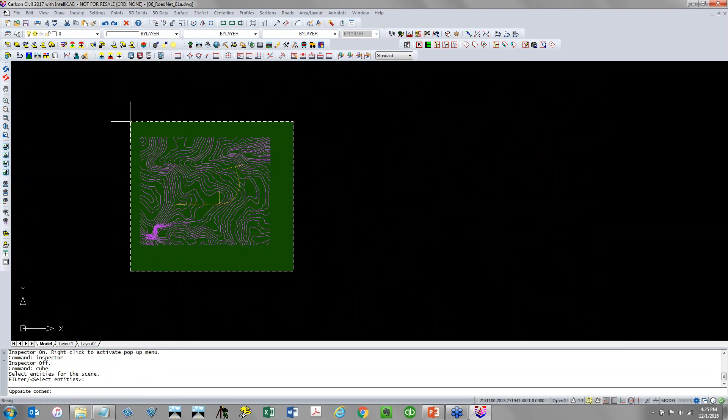So I'm going to turn my drawing inspector off. Let's look at those contours in 3D and just make sure. So we're ignoring zero elevations again. So if I uncheck ignore zeros, you can see my 2D road lines down here. But those contours are elevated, so I can use them to build my surface. And that's the first thing I need to do. So I'll go to Surface, Triangulate and Contour.

So I'm going to write a triangulation file. I am going to call this 1201. We'll say this is a RoadNet, EG by contours. Anytime you build a surface from contours, the quality is not the same as if you were doing it from an actual surveyed area with points and break lines.

Carlson even gives adjustments down here to interpolate ridges and valleys, minimize flat triangles, interpolate summits and pits. So this just makes some internal adjustments so that the surface is better. It's not perfect. But anytime you build a surface from contours, you want to turn these on. If you're making it from points or points and break lines, turn these off.

Contours. I've got contours. I don't need to see new ones. I really just need the back-end surface model. Don't need labels. Contours are 2D polylines. So I'm just going to window this. It's ignoring zeros. So if I go back in now and look at my surface viewer.

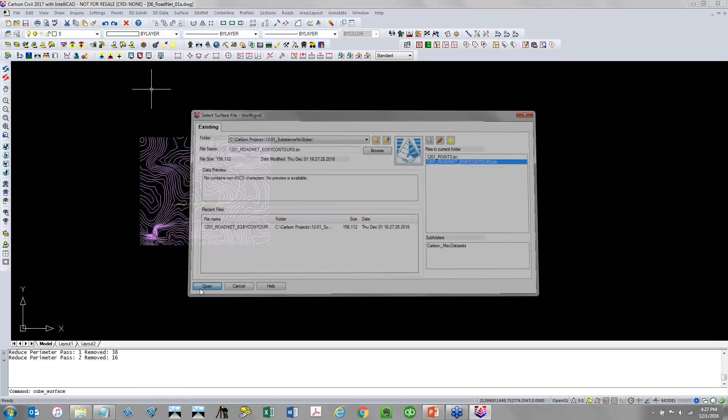Oh, hello. It's right at the edge. That's interesting. I don't get that. All right, gremlins. So I've gone through this twice today. Never had that happen. So I'm not sure, but it was just at the edge, so everything in the middle here should be fine. So we shall see. If not, I will see it shortly.

All right, road network. When we start a road network, everything, all the important stuff is saved in this RDN file. And I'll call it RoadNet 1. I'm going to start off by checking out my settings. Existing surface, I have to have. I can't get anywhere without that. I'm going to leave the rest of this set to defaults.

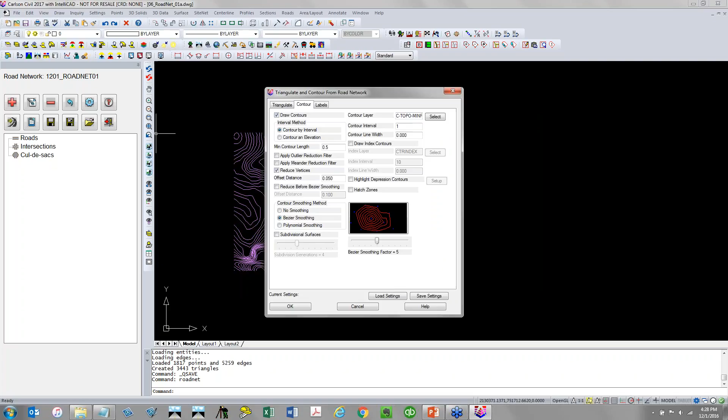Output options. When it creates a new surface, I want it to name it RoadNet, and we'll say PG Roads. So this is going to be a proposed ground surface just of my road areas. Contours, it will draw new ones on this layer, and it's not going to label. I'm not too concerned about that right now. A couple things I'll come back in later and do is merge the proposed roads with existing. So I'll make one combined surface that I can use for hydrology.

Label profile on centerline. I mean, I can do that. I'm not gonna. I'll come back in later and show how to elevate pads and elevate lots using my road design. And everything else here is good. Click OK. I'm going to save this. Now I'm going to add roads. So I'm going to use this button, add a new road.

Actually, let's explain here. So this is going to be my road 1. This comes off of an existing highway out here. It's going to dead end to road 2. This is my road 2. I'm going to have a cul-de-sac here. This is just a stub out onto existing ground into a different subdivision, or one to be built later. Regardless, here it's going to tie into existing ground. This will be my road 3, and it's going to be a lollipop cul-de-sac too.

I don't have anything created, so I've just got to screen pick this polyline for road 1. Now I'm going to assign a centerline file to it. So I'll call it 1201 RoadNet CLRD1. Let's make it a little different. Put an underscore there. Next, this is for a proposed profile that's going to be designed. It names it the same as the centerline. Notice when I gave those the names, it's starting to populate my tree over here.

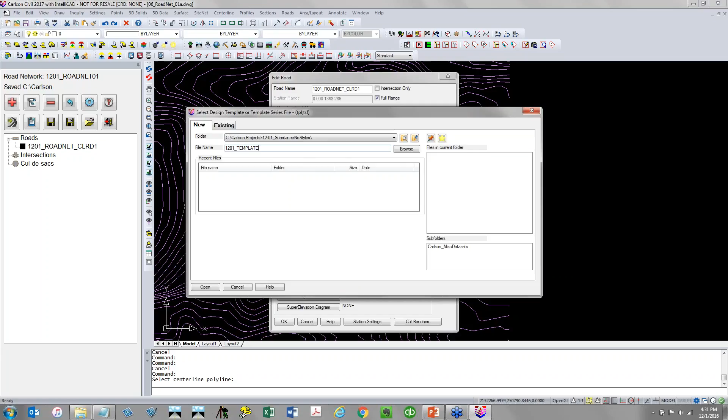So when I build a road or design a road through RoadNet, I have 3 files that are required. That's centerline, a design profile, which we've created but we've not actually designed. The file's there, it has to be there at this step. So it had us create it. We're going to go in and design it later. And then I need a template. So my template, I'm just going to name template 1 because I'm creative. And then I'm going to design it.

So I'm going to start from the center line out and give it a grade. From the center line to the edge of pavement, it's going to be a minus 2.08%. I'm going to go 13.5 feet, and that'll be to the edge of pavement. So I'm going to give that ID, so that is a point on the template, I'm going to give it an ID name of EP. That needs to be unique and simple. So I can see it up here.

I'm going to add my curb to this. So I've got 3 different types of curb. So I'm going to use this curb type 1. I'm actually going to have 30-inch curb as a base. So my gutter pan, my width here is going to be 24 inches. So if I change this, notice that the width right now is 12 with a base of 18.

If I change this to 24 and click down here, it pushes everything out. So it keeps everything relative. The material for this is going to be concrete. And then the ID, I'll just use BC for back of curb. And you can see the graphic here.

Next, I'm going to add, so what this is going to look like is it's going to have a small little 2-foot shoulder section, grass strip, let's say, then a 5-foot sidewalk, then another 2-foot shoulder section, and then cut and fill slopes. So for the grass strip, I'll do another grade at 4.17% positive for 2 feet. And the ID for this, I'm going to do SW1, so that's the inside of my sidewalk or just a sidewalk 1 point.

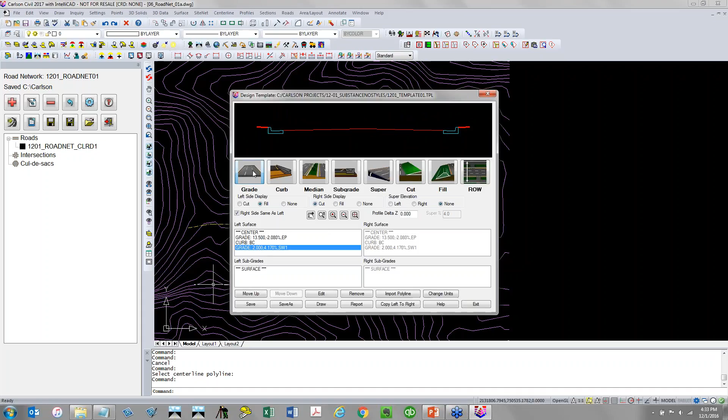The next one is going to be the top of my sidewalk. So all these are grades. They're just 3 stacked right behind each other. So we'll do 2% max for 5 feet, and this will be my SW2 point. And then my last little grass strip for a shoulder, 4.17% for 2 feet, and then SH for shoulder. Ta-da. All right. So I can click on these, and it's actually showing me which one.

I'm going to add my cut slope. It's only going to display on the right side. So maybe we're going to do a 2-to-1 for cut. And on the fill slope, I'm going to do maybe a 3-to-1. Now you can get creative with these. You can force a cut. You can force a ditch on the backside. You can use a berm. So all that can be done here through this cut and fill grades window.

And now I need to add thicknesses. So I'm going to have 2 inches of asphalt. I'm going to have 6 inches of stone base underneath that. And then I'm going to have 4 inches of sidewalk, concrete. So I'm going to do all that through the subgrade button. So first I've got 2 inches of asphalt, set that to inches. My material, I'm just going to do ASPH, distance.

This is pretty important. I don't want to put in 13.5, which was the actual real value, the distance between the center line and edge of pavement. I want to use that template code. And the reason is I'm going to add a turn lane here in a little bit, and that edge of pavement is going to widen out and be wider than 13.5 feet. So if I tie my subgrade to this, when that edge of pavement swings out for the turn lane, this subgrade will go with it.

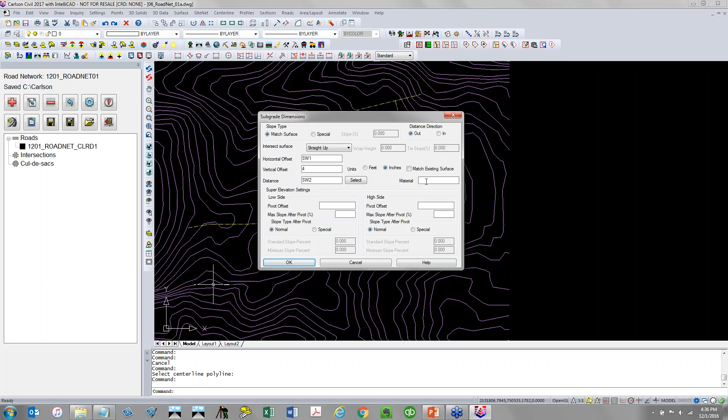So for the sidewalk, I am going to have a horizontal offset. So where does it start? It's going to start at that sidewalk 1 point, 4 inches, and the outside distance is going to be defined by SW2. This is concrete, just like that. Let's save it and exit.

Any questions? Let me scroll up and down through here, make sure I'm not missing any. Sometimes this is good at telling me when there's a question, sometimes not so much.

All right, so I've got that in here. Now let's go back in and let's take a peek at that profile viewer. Now, notice as my cursor moves along this, the white is my proposed, the red is the existing. If you look at the top, it's telling me station, elevation, slope, and depth.

In the drawing, it's actually showing me where I am on it. So if I go in here, I can insert a PVI. Maybe I'm going to go with that 50 feet again for minus 2.08 to match the crown of the other road. So that's how I'm going to set that second PVI.

And then maybe I'm going to use add PVI. This lets me just screen pick up here in the profile viewer. So maybe I just want to pick a point right about here. Okay, I'm going to make this a little roller coastery. And then let's just add a vertical curve, 200 feet, 200 feet. All right, so it's a little roller coastery.

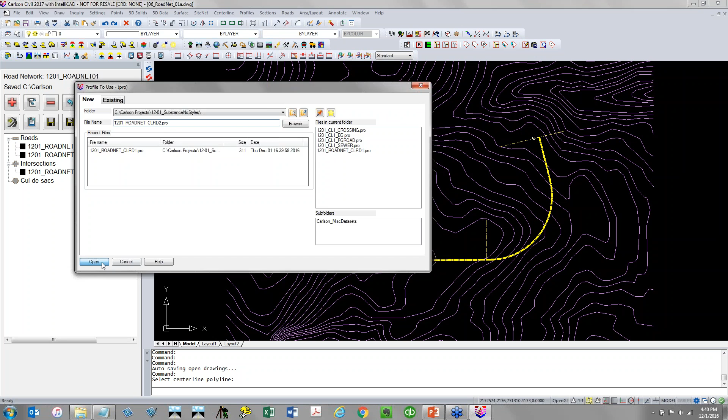Notice that it shows up that it found that intersection, because graphically those two polylines intersected. Notice that it lists centerline of road 2 first. That means that it's the primary road. So its vertical design is going to take precedence over whatever road 1's doing. My new profile is being saved here. Now let's look at that profile.

So by default, when you create that new empty profile, the only thing it knows to do is to tie in at the start and the end at existing ground. Well, when it does that, here's the intersection. Those two vertical yellow lines represent the edge of pavement. So it's showing that road 2 going through that intersection is a fairly significant cut. And if you remember, when we designed road 1 going in there, it was a fill.

So without making any changes, I'm just going to get out, and I want you to see what the profile of road 1 looks like now. The only thing we did was add road 2 that had a different profile. And because road 1 is secondary to road 2, the profile of road 2 takes precedence, so it has manipulated road 1's profile so that it now meets the elevations of road 2.

And if I go in here now and just change, so this is the power of a network, by the way. So if I go in here and force, why is it not doing that? If I go in here and force a PVI, there we go. And let's give it a little vertical curve. So we're back to being a fill situation here at this intersection.

And all we do is make a change to road 2, and road 1 profile is going to follow right along. So you can see it's now in a fill. Pretty slick. Any questions? All right.

Let's see. Switch back to road 2 here. Let's give it a different template. I'm going to edit this template. And we've got a 13.5-foot pavement section. So if I go in and change that to a 12, because this is going to be a smaller road, you can see everything's shifted, or at least followed.

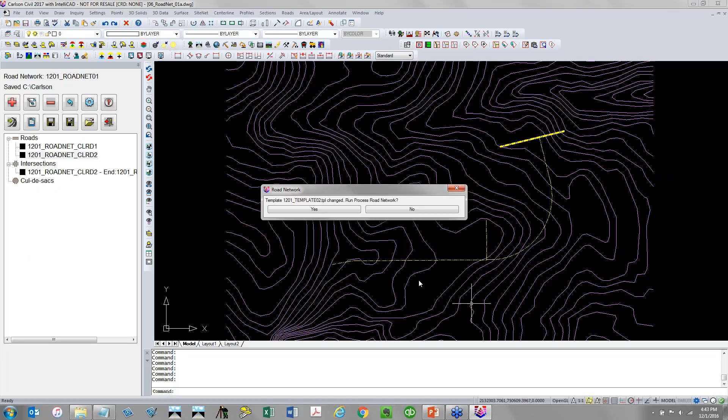And I'm going to do a save as and just call this template 2. And then I'll assign template 2 to this smaller road. Not going to design it yet. All right. Road 3, there's not much hope for road 3.

Okay, there's my profile. And if we look at that profile, you can see there's not a lot of hope. It's just going to go straight uphill, which is fine. We'll leave it. I will change the template to the smaller of the two. All right, so we got this saved. I'm going to hit the save button here. What that saves is that RDN file. If I crash, I haven't made any changes to the drawing at all. I can just go right back in and pick up where I left off.

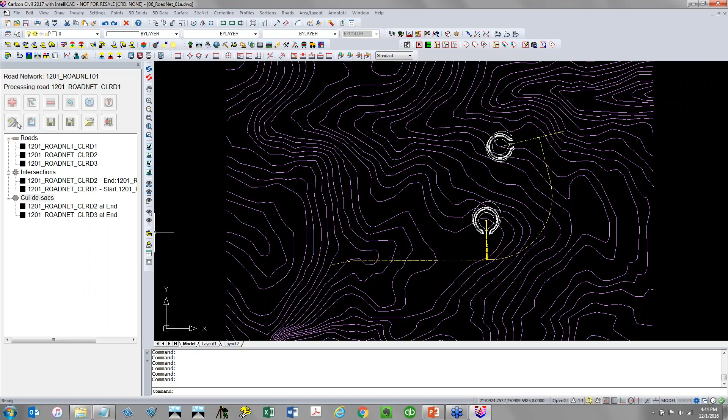But I do want to add cul-de-sacs to the end of road 2 and also the end of road 3. So add a cul-de-sac to road 2. 45-foot radius with a 25-foot fillet going in. I'll add a cul-de-sac to road 3. Same thing. It remembers. I think I'm done. So I'm going to hit save on my RoadNet, and then I'm going to hit this button to process everything. Hopefully it's what I want. Looks good.

Okay. So let's see what we've got. So everything's graded. Our intersections have been graded. Our cul-de-sacs have been graded. Everywhere over here that we see intersections, we see cul-de-sacs, we've actually got the ability to just make edits to all of those, the profiles of each of those as well.

And everything's dynamic. So if we go in here now and go to road 1 and make a change, for instance, let's just pull this guy back down a little bit, something like that. Save it, exit, OK. Save and process. You're going to see my grading update. So everything's a little bit steeper.

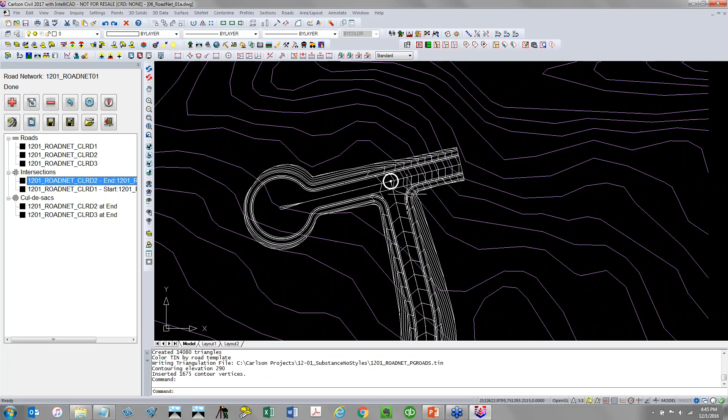If we go into the intersection, so for instance, right here, if I click on this, you can see my target. I can edit the profile going around every corner of every intersection. So this particular intersection only has 2 corners, a front left and a back left. If I edit the profile, it's unwrapping that corner here. So if I want to force a low point, I can do so. I can just pull that down. And maybe I pull that one down too.

Save, exit, and just reprocess. Ooh, got something goofy going on here. Let's see what, yeah, see, it's a low point. It's not a pretty one.

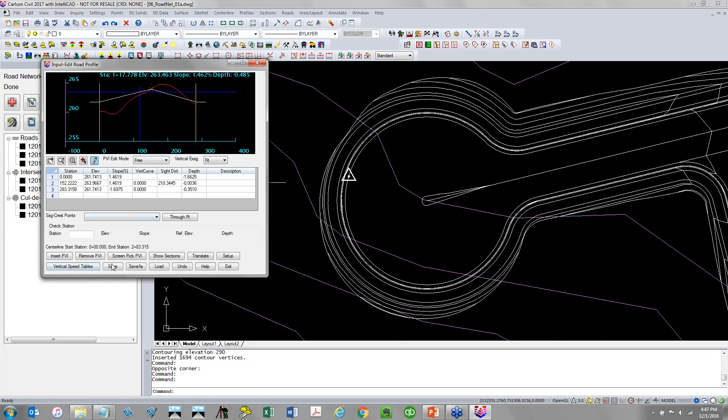Same thing here on this cul-de-sac. All the cul-de-sacs can have their profile designed. So this is the high end. Maybe I want to force a high point along that. So if I just grab this, I've got a PVI. Save it, exit, and let's reprocess. It keeps jumping back to this cul-de-sac. So you can see my grading's changed.

All right, so let's see some other things that we can do with this. If I go back to, let's see what I want to do first. Let's just look at a quick report. We've got most of this done. So a quick report here, we can see our total cut and total fill. We can see all of our quantities, material quantities.

If you want to really get down and dirty into it, you can see each portion of each road. So this is the main part of road 1. You can see all the end areas, the last part of road 1. If you scroll on down, it will break down each corner of each intersection. It breaks down each cul-de-sac. As much detail or more than you need.

I know what I want to do. Forgot. Let's just save this. Let's turn on a layer. I promised this earlier. And I use erase layers here. There's really something silly going on. All right. So this is going to be a new edge of pavement. I'm going to have a turn lane here. All this is a polyline.

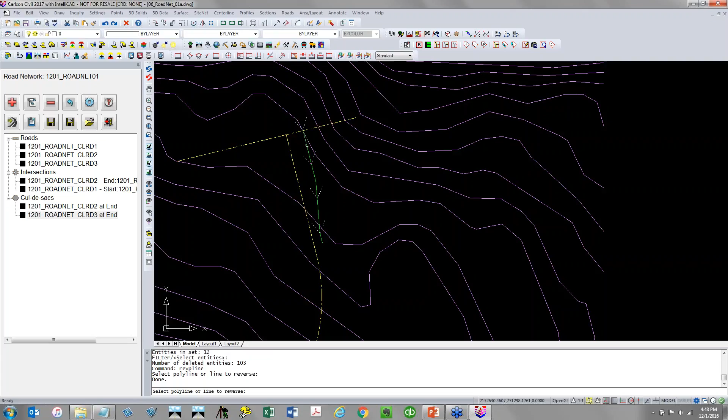It doesn't have to be anything special. I may want to check it and make sure it's going in the direction it's supposed to be. So it just needs to be going in the same direction that the center line is. And this is going to be added, it's an optional file to my center line. So it's a template point center line. In other words, a point on my template is going to follow that edge of pavement, which I'm going to define as a center line.

Each road can only have one template point center line, but they can have multiple offsets. So this is just going to be, I'm trying to remember what I called it, road net. So this is going to be CLRD1. And then I hit the edit button. So I'm going to add a template ID. My point EP is going to follow this polyline. So I'm going to name it.

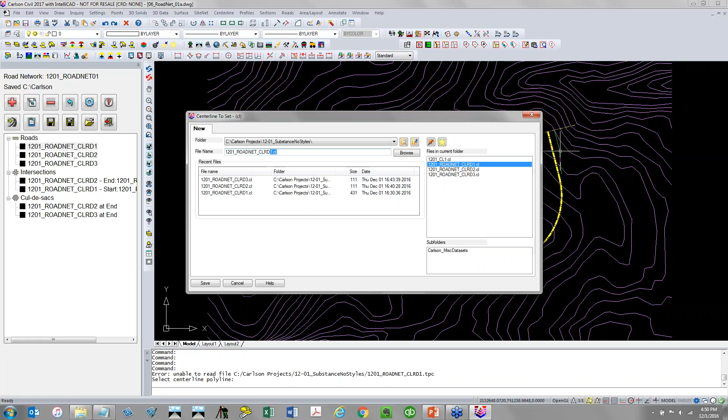This is CLRD1, and then this is the right edge of pavement. Side to use centerline as the right. That's it. So if I have other polylines for other points on my template, I can surely use it. Click OK.

Sure. So just let it go ahead and push through, and you can see how it has widened that out. It is holding my profile edits here, so that's why it's still goofy looking. A couple other kind of neat grading things that we can do in here. Let me turn on a couple more layers.

So if I have my drawing inspector on, these are 0 elevation polylines for my building pads and 0 elevation polylines for lot lines. And there's no vertices on these. Okay, just a start and an end point. In settings for RoadNet, I can elevate building pads and I can elevate lot lines.

So for instance, what I'm going to have it do here on elevate pads, reference template ID. I'm going to say go from the elevation at the shoulder point, find layer, 2D building pads, find any polylines on layer 2D building pads within 100 feet of my shoulder, find the highest elevation. So as it goes along that center line, along that building pad, find the highest elevation,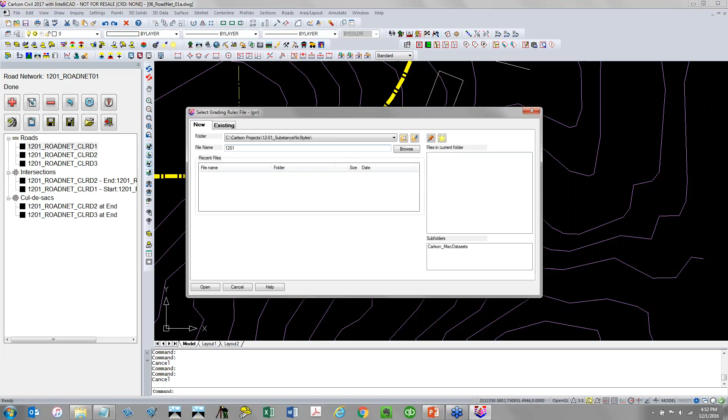Elevate lots. It's a little more complex. We're going to apply grading rules. So I am going to set a grading rules file. All right, so here, this is cut conditions. This is fill. Kind of similar. I'm going to come off of a point on my template, and I'm going to go for, let's just say 20 feet at, I don't know, 5% slope, minimum, maximum, normal.

Okay. Then I'm going to go for 60 feet at a vertical change of 0. So that's going to be flat. So it's going to go up for 20 feet at 5%, then flat for 60. And then at the back lot, it's just going to go down and tie into existing ground. I want to apply all these rules that I've set up for cut conditions over to fill. So I'm just going to hit this button, populates this, save that, and exit. So those are my rules.

The reference template ID, again, it's going to come from the shoulder when it applies those. Input 2D lot layer. It's going to be 2D lot lines. Let's copy that while I'm here. And it's going to create new 3D lot lines. Click OK. Save my road network, process.

Now, something to keep in mind, it's not the magic go button. It is not incorporating these into the surface, but it is elevating them. So you can see the elevations here. You can see the new vertices that it's created. And if I isolate, let's say those building pads, the lot lines, or I don't know if I can grab these or not.

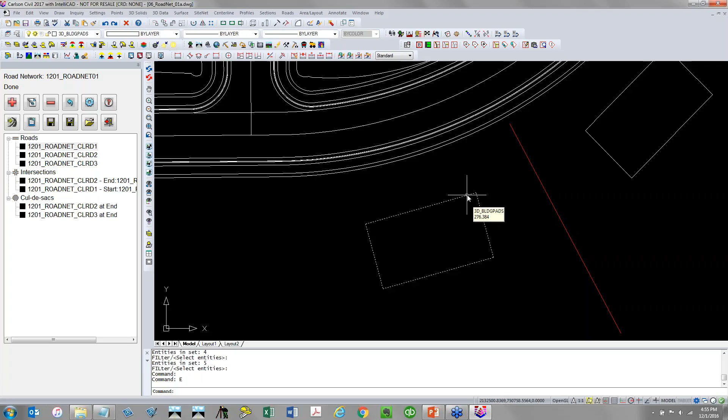All right, well, I kind of lost track. But anyway, that's how it set it. I forgot what my slopes look like. Yeah, okay, so I got a high and a low point in there. So right in here, it's going uphill. All right. So this should be my highest point, 276.38. Yeah, there we go. How about that? All right, so any questions on this?

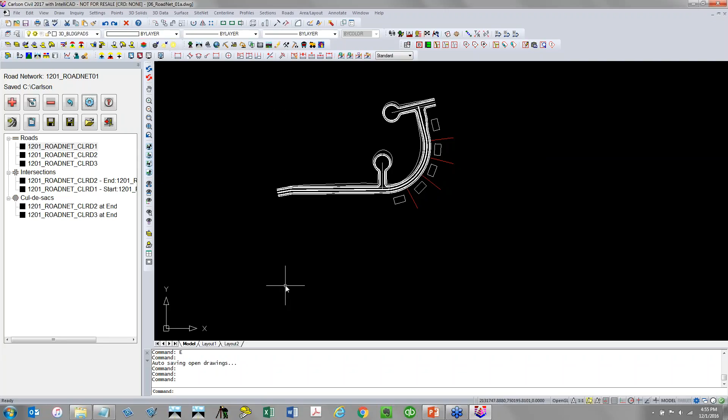All right, got just a little bit. I'm going to show you just a touch of, yeah, I got to show you one more thing. Let's merge road with existing. So we are going to do this, and we'll say it's merged. And I'm just going to turn this off for the time being. Save it, process.

Okay, so everything's merged. If we look at these in 3D, our surface file, we've got just our roads, and it looks like this. And if we look at the merged, yeah, it looks like this. I still got these guys down here, but so this is the surface we're going to use to do just a teeny bit of hydrology. I am not anywhere near Mark Long's caliber, so I will do my best.

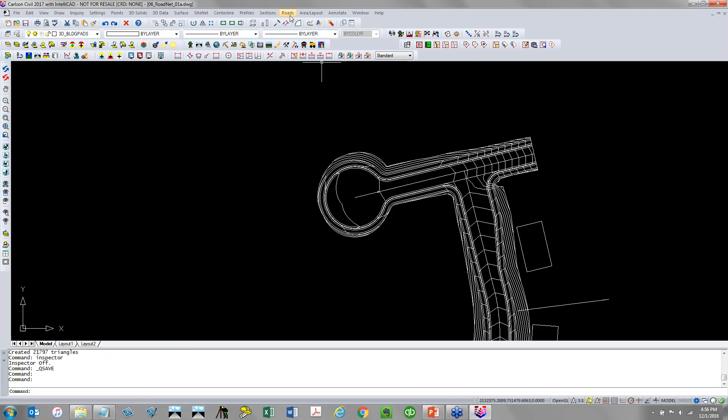I'm going to turn off that drawing inspector. I think it may be interfering a bit. All right, so let's go down here. Everything here is sloping this direction. We can confirm that and go back to RoadNet real quick. Centerline 2. All right, so as I move along this, we're kind of backwards. So the low point is at the tie end of the other subdivision. Everything slopes downhill to there, just kind of barely.

So as I switch over to hydrology and go into sewer network settings. All right, so a few things. I'm not going to get too playful here. I'm going to design a storm sewer, and I need to give it a name. So today's date. And then the surface file. So in this case, I am going to pick that merged TIN

to design it. I am going to design upstream to downstream. So I'm going to put a couple in right here, another one in right here, and down here. Auto connect structures, it will do that. It may not do everything I need it to do. I am going to put in a rainfall ID, so just something very generic, just so it can calculate a

little bit of flow. The pipe, I've got my minimum cover, minimum, maximum velocity, so it's going to let me design outside of these parameters, but it's going to flag me if I do. So I'm going to match any different pipe sizes at the crowns. You can see that. Yeah, I think that's it.

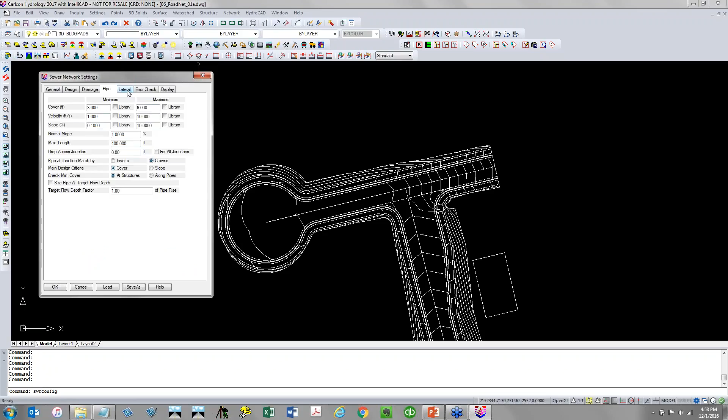I'm going to create a sewer structure by screen picking. So when I screen pick, you can see everywhere my cursor goes, it's actually reporting back the elevation. So I'm just going to pick a point right about here. All right, so manhole 1, it names it. My inlet, it is an inlet. It's a combo. It's on grade, so it's not at a low spot.

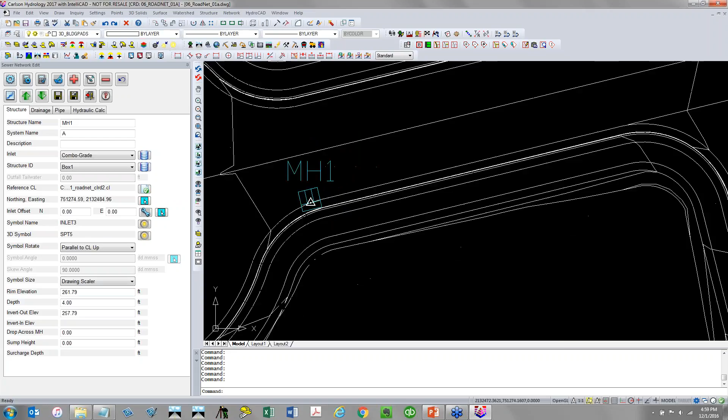Reference centerline. So when I apply, if I go down here and look at the symbol, I'm going to use inlet number 3 or inlet 3. You can see it's not turned the right way. So if I associate that with a centerline file, which this is centerline road 2, and tell it to rotate. Is that right? Nope. Never can get that right. There we go. That's the way I want it. So that's my manhole 1.

I'm going to add another structure right across the street by screen picking. Something like that. Okay, so now I've got to tell it to twist the other direction. There we go. You can see the pipe that it's drawn. So if I switch to the pipe tab, it highlights it. I can change my pipe size, material, whatever I need to there. The arrow is showing me the direction, so this is just kind of a very minimal plan labeling that's going on.

Let's go to, probably doing this backward. Let's just add another structure. Yeah, don't pay attention to me on design. Let's see. Let's put one here, even though it's not a great place. All right, but we're going downhill. And we will keep going. Let me put in one more. And let's pop one in here. And then we'll put in one more. I don't have my contours on, but I've got a big low area out here.

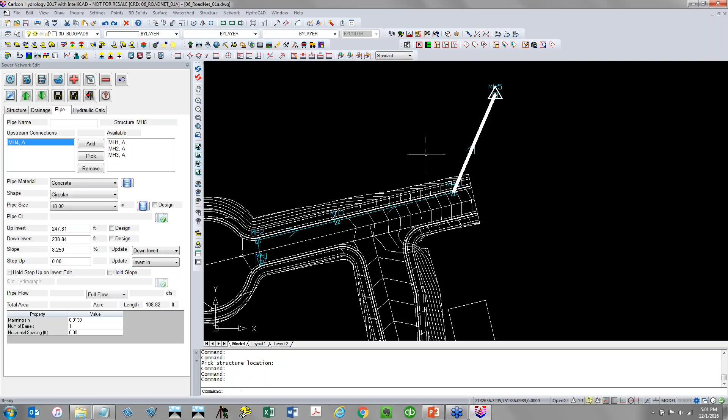So out here, this is going to be no inlet. So there is no inlet. I'll just set that to none. And I've got an outfall. So let me just hit save. And let me turn on my contours. There we go. So you can see where I'm going here. All right, so I've got this.

I want to add in one more structure. I want to put a catch basin in here. So this is where it gets a little tricky. I'm going to go through it, probably badly. Fight my way through this a little bit sometimes. But if I add another structure, now I've told it that I'm designing upstream to downstream. So now, all of a sudden, if I go here, it's going to confuse it a little bit.

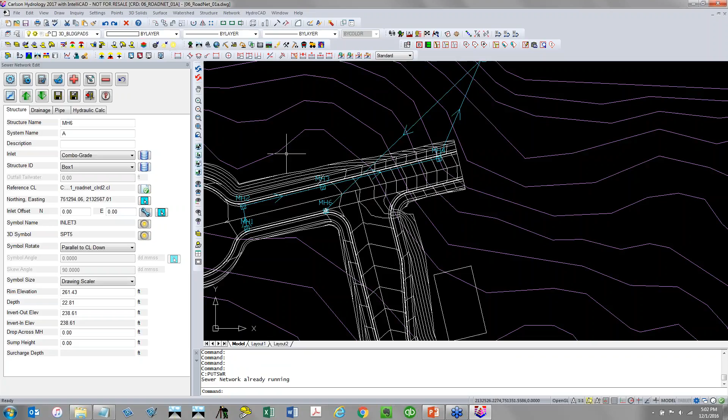All right, what do you want to do? So there is a pipe from 2 to 3, so that's going to be this one. How do you want to handle this? I'm just going to do a new structure separate from that pipe. And so it assumes that I'm going to be flowing downhill back to here, which is not the case. I'm going to save my pipe network. I'm just going to leave that.

And let's switch over. Notice I've got some up and down arrows. So if I go up, I'm going upstream from one structure to the next. So I want to go here. Let's look at the pipe. And that's not it. Let's go back here. Let's go downstream to here and look at the pipe. So right there is the pipe that I don't want. So I'm going to remove that pipe.

It's no longer there. And I need to add a pipe here. And just because of the way that we're doing this, I'm going to be able to do it downstream. So I actually want, it's not going to be an upstream. Okay. I'm going to edit manhole 3. I think I can do this.

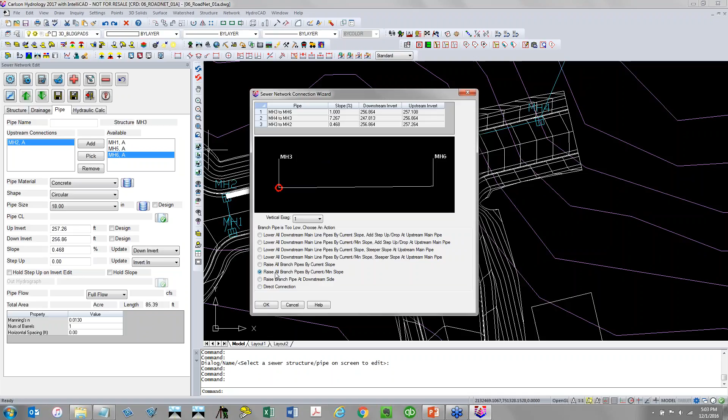All right. So manhole catch basin 3 has one upstream connection. I'm going to pick manhole 6 as another upstream connection. And branch pipe is too low. Let's just raise it at the, that's kind of neat. I haven't played with this too much. I'll just leave it like that. I don't know if that's going to do it exactly, but we've got something in here.

If I go to drainage, I'm highlighting number 3 now, and I can actually tell it to calculate the drainage area, see if we've captured anything. Hopefully we've captured something. There we go. Oh, hello. That's a little different. Not sure if I believe that. We'll go upstream one structure. Let's calculate that one. Okay, it's probably just my placement of the way that I've got this.

Let's just have a little fun with it. Let's move this, pick point, and I'm just going to pull it out just a tad. And let's recalculate. Yeah, it recalculated, maybe not for the better. But anyway, y'all kind of can get the idea. All right, so we've got something here just real quickly because I know I'm pushing on 2 hours here.

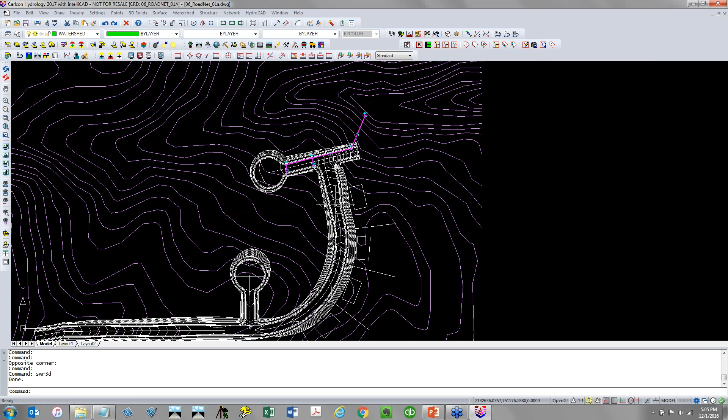Let's go to network. We're going to draw sewer network of 3D faces. And so you can see that's what's been drawn in here. So really what this gives me is just a visual check. So now I can view this in my 3D viewer. A little more than I planned. And a lot more than I planned. Let's try this again.

Let's go from this direction. There we go. Yeah, I can see that better. All right. Yeah, doesn't look too terribly bad. Not sure everything's flowing downhill the way it should, but a lot of it is. So nothing that jumps out at me too badly there. So if I want to, I can go right back to here and I can draw a data table. Two tables, one for structures, one for pipes. I can set it to do up to down or down to up.

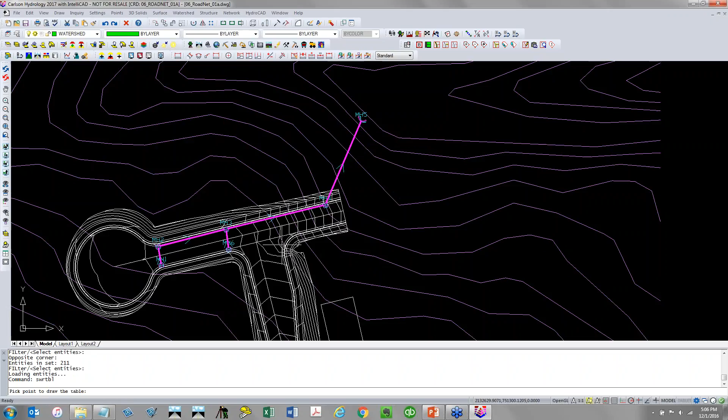I can link everything. And that's something I haven't mentioned for those of you really unfamiliar with this. Pretty much everything we're doing can be set up to automatically update as you make changes to related files. Or you can tell it not to update where you have to process and kind of manually push it to make those changes. You can set it to prompt to where as a change is made, it asks if you want to update, or have it to automatically do all the updates. And pretty much every step of the way, you're going to be able to tell it how to handle changes.

If I go in, this is for my structure. If I change this to pipes, you can kind of see. Okay, and then if we want to see this in a profile, so my upstream structure is going to be 1, downstream is 5. So if I've got that different leg from 3 to 6, I would just change these to do that part. Profile output, I've got an option to take it to a profile file, or to draw, or to do both. So we're just going to do a draw only for now. Got all kinds of different options.

Draw grid, remember when it creates this, this is my setting, so I've got full control over how everything is displayed and drawn and annotated, and that's what we're looking at. So that is my fly through of the Carlson desktop products.

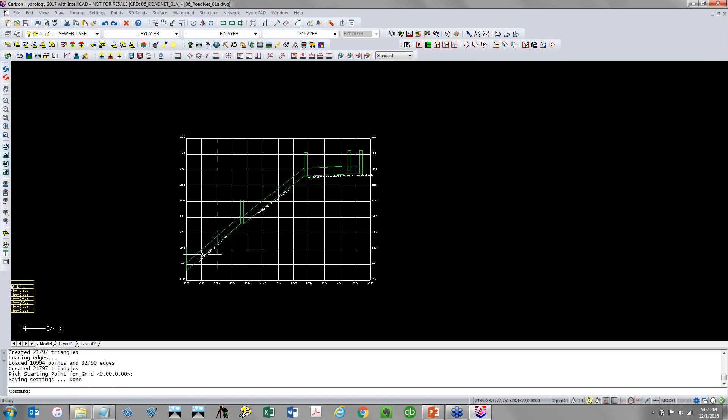It's been a while since I'd done a demo. I actually have Scott Griffin doing most of these for me, but he's injured. So I was glad to get back into it, and I hope I did an okay job.